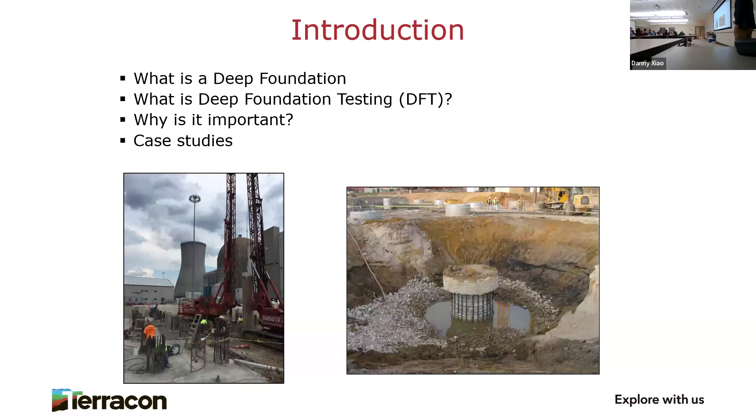So let's get started here—just an introduction of what this talk is going to look like. We'll start with: what is a deep foundation? I understand there's some geotech focus here, there's probably some structurals, but you may not all understand some of the things I'm talking about. So forgive me if I talk below some of you, and forgive me if I'm not technical enough for those of you that are familiar. We'll talk about what a deep foundation is, what deep foundation testing is, and why it's important in construction and in this process. Throughout, I'll have some case studies and project examples that demonstrate the importance of this deep foundation testing.

All right, so to get started, a little bit about Terracon. Danny introduced Terracon a little bit, but we're engineers and consultants with 4 main service lines that span the entire project lifecycle, from the very beginning stages of a project to the very end where we're involved on the construction side. Our 4 service lines are geotechnical engineering, environmental engineering, materials testing and engineering, and facilities engineering. Geotech and environmental happen very early on. Materials testing happens during construction, verifying the plans and specs. And facilities engineering happens on existing facilities that have maybe been around for 100 years and are going to be repurposed.

So the deep foundations I'm talking about today are mostly involved with geotechnical engineering and materials testing and engineering. On the geotech side, for those of you that aren't familiar, we're looking at the soils, designing foundations, making sure that the foundations and soils we're building on are going to be suitable, and we're not going to end up with a Leaning Tower of Pisa type situation where the building is tipping because the foundation is inadequate for the loads being applied. So foundation testing is important on the geotech side, because we want to make sure that what we're recommending is actually happening during construction on the materials testing side.

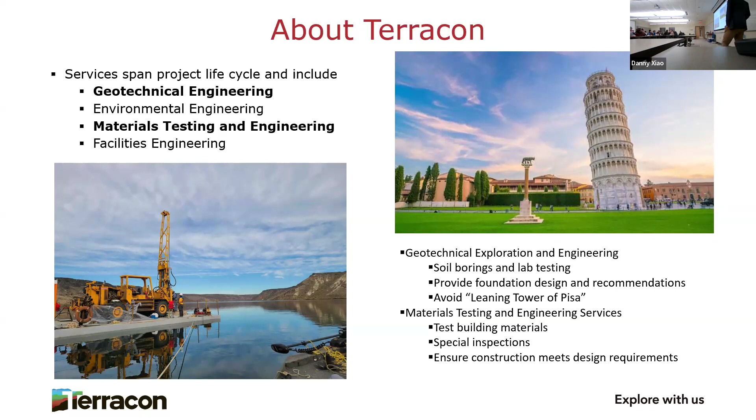So let's back up a little bit. What are deep foundations? And what types of foundations do we have? Well, there's two types of foundations: shallow foundations and deep foundations.

I'm not going to talk too much about shallow foundations here, but typically shallow foundations are associated with your lighter loaded structures or structures that are being constructed on competent soil—maybe resting on bedrock, or you're not dealing with expansive clays or something that's going to lead to settlement.

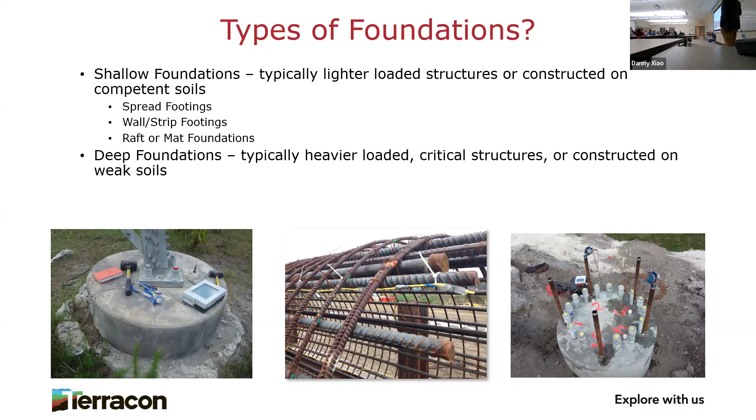Deep foundations are typically heavier loaded structures, critical structures, or constructed on weak and incompetent soils. So what is deep foundation testing?

Well, again, a little bit more on deep foundations. Deep foundations are intended to transfer structural loads through weak soil materials to more competent underlying soils, like bedrock, in order to meet load carrying capacity requirements. Won't talk too much in detail there—there's an equation, side resistance or skin friction plus toe resistance.

The thing I want to point out is it's a critical part of our construction of structures—typically bridges, which I was going to focus on and kind of broaden that. But bridges, federal buildings, tall structures, hospitals, arenas—a lot of big critical structures rest on deep foundations, foundations that transfer the load oftentimes down to bedrock or a strong material below us.

And deep foundation testing then is testing of those deep foundations—oftentimes non-destructive evaluation of the quality, integrity, and real performance of these foundation elements.

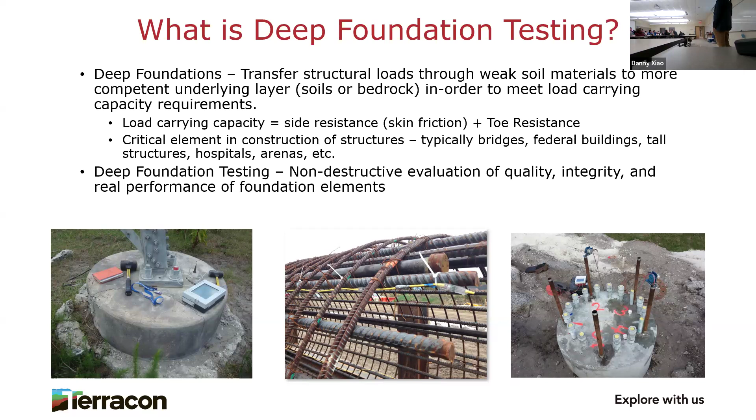So why should you care? As I said, deep foundations are a critical element in your structure. They're also a really expensive part of your structure.

Everybody cringes when we issue a geotech report that says it needs to be on deep foundations, because it means you just added a lot of extra expense to your project. If you can get away with shallow foundations, you're going to save a lot of expense. So it's a critical part of our project, but it's also really expensive—we want to make sure that this investment is sound.

Terracon's been around for 60 years—this is our 60th year doing business, doing geotechnical engineering. And over those 60 years, we've been recommending deep foundations, and we have seen a lot of problems with the construction of the deep foundations that we recommend.

Here is a picture of a deep foundation. This is a drilled shaft—I forget if it was a 6-foot diameter drilled shaft. It was for a transmission line in Mason City, Iowa, so not too far from here.

We did the geotech, we helped design the foundation, and they go to put the pole on the foundation, and it immediately starts to settle and tip. They pull it back off, they set it down, they call us wondering what the heck—there's a whole bunch of fingers being pointed, what's going on here?

We look at our report, we say there's no way that this thing should be settling. The structural engineer agrees that there's no way—it's over designed like everything. And so we get up there and we core, and 10 feet into the structure, we're no longer in concrete, we're in soil.

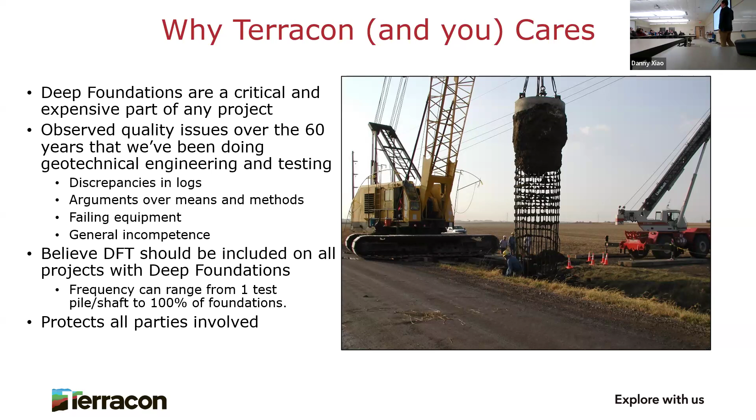So if we're the geotechnical engineer, having some sort of assurance that what we're recommending is valid. It protects the contractor in case something happens down the road. They did some due diligence, they did some testing to ensure that their foundation is good and there were no flaws. And it maybe doesn't protect the owner as much, but it at least gives them some warm and fuzzy feelings that this thing they're paying a lot of money for is a sound foundation.

Types of deep foundations: first, we have drilled foundations. So shafts, piers - you've probably seen some drilled foundations if you've been around construction. This is an example of a drilled foundation here.

Auger cast piles - this is an example of some auger cast piles here. You're drilling a hole and the augers are moving the soil. Then it's got a hollow center. You send grout down the center of that and it pumps up, and you remove the auger and it fills the hole with grout, and then you put some sort of a cage or center bar in that auger cast pile. And then driven piles.

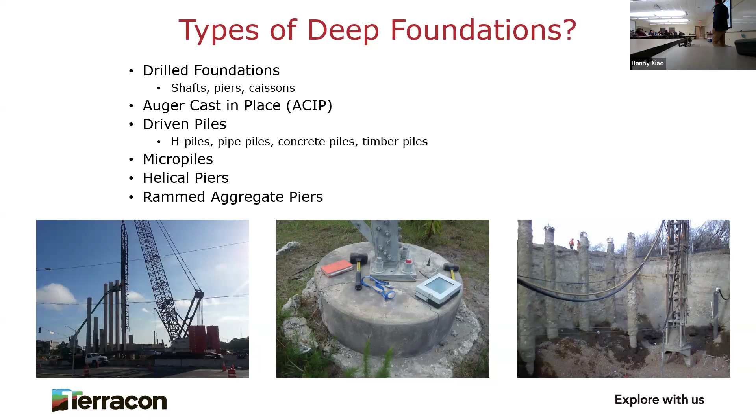So these are the three main foundation types for deep foundations. More recently, some newer methods have become more popular - they're efficient and cheaper - but since they're newer, there are fewer methods for deep foundation testing. So I'll focus on the three that are most common: drilled foundations, driven piles, and auger cast piles.

So deep foundation testing falls into three buckets. First is quality inspections and monitoring - that's just, ahead of time, we're going to test the concrete, we're going to be there to create a log, we're going to verify that things are generally being done as planned. Stuff as simple as checking elevations, testing the concrete as it comes out of the truck, and there are some tools for actually inspecting an excavation.

The middle and this last bucket is where I'll focus this talk. Integrity testing - actually testing the integrity of the concrete or grout of an in-place foundation once it's poured. And then load testing - once the foundation is in the ground, actually applying a load to the foundation, making sure that it's going to stand up to the load it's designed for.

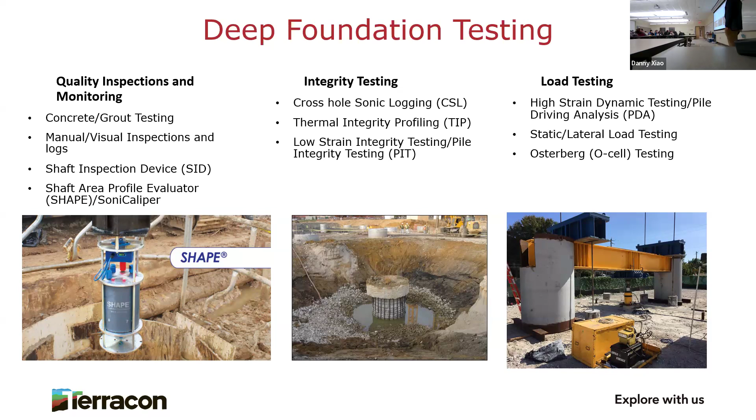So we'll start with this first bucket and hopefully breeze through this pretty quick - the quality inspections and monitoring. So first is concrete and grout testing. A drilled foundation has a material, right? So we're going to test the material.

We're going to be there when the truck shows up, we're going to take a cylinder, we're going to test the grout or the material. There are three types of tests that can be performed. One is a slump test - just to make sure the concrete is supposed to come off the truck with a certain slump. Then the second is a compressive strength test.

So we take a cylinder, we keep that cylinder under certain conditions, we take it back to the lab, and then 7 days later, 28 days later, we break it. We put it in a machine, we apply a load to it, and we see how much load can be applied before that cylinder shatters. So if it's a 4,000 PSI concrete that's specified, we want to make sure we can apply at least 4,000 PSI to this cylinder before it breaks. There are different things they look at too - how the concrete breaks, what types of shatter affect what happens on the back end if it breaks in a particular way.

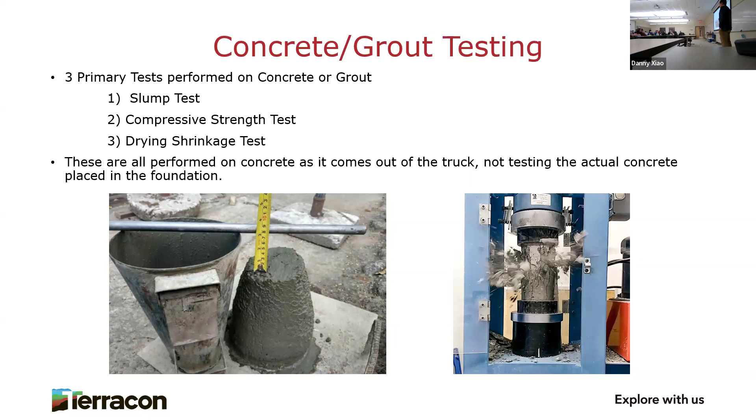So these tests are all performed on the concrete coming out of the truck. It gives you a good sense of what's going into the hole, but you're not actually testing what's going into the hole or the actual field conditions. Because if you're pouring right now when it's very cold, that concrete is going to react differently than a concrete cylinder taken back to a lab in a controlled environment.

Manual visual inspection - that's having somebody on site to visually see how things are doing, verifying means and methods, making sure the contractor is not doing something stupid. And that's surprisingly not a requirement. There are projects that slip by where contractors are just out there doing whatever they want, and then you end up with problems.

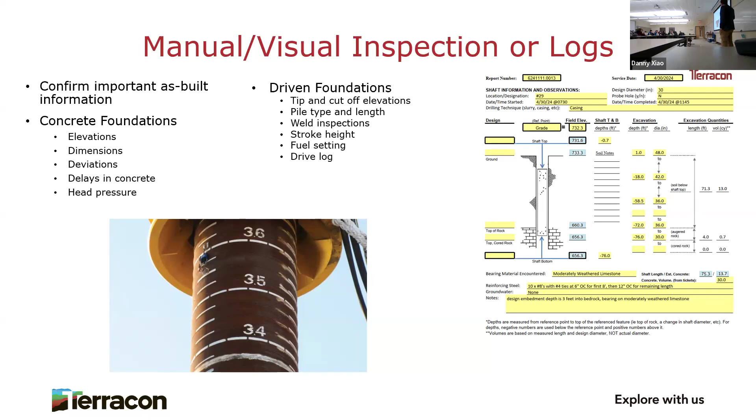This is just an example of a driven pile being on site, verifying the drive criteria and the hammer performance, and creating a log for either a driven pile or a drilled shaft. Here's some of the stuff that we're going to want to be verifying and looking at in the field.

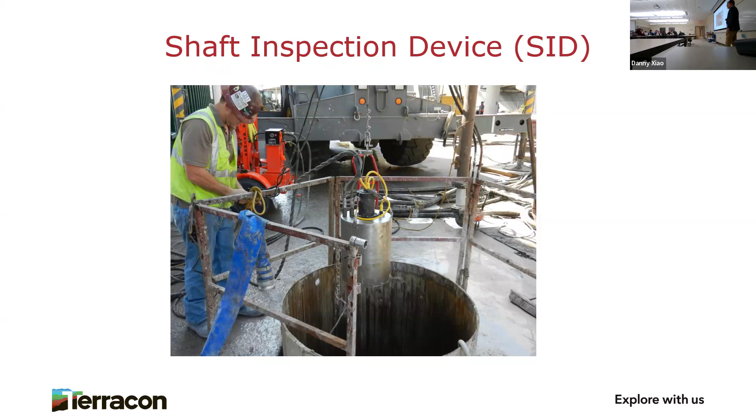So I mentioned a couple of devices. There's a shaft inspection device that can be sent down an excavation to make sure that if that shaft is end bearing, it's supposed to be bearing on a good flat, hard rock surface. Problem is when you drill that excavation and remove the soil, a lot of times you end up with a muddy mess at the bottom, and you want to make sure that's clean. Decades ago, you would actually send a person down the excavation and they would clean it out or inspect it. OSHA has since said that we shouldn't be doing that. So now we send this shaft inspection device down and it measures that and makes sure you're on a good hard rock surface and that there's not going to be a couple of inches of muck at the bottom of your concrete. And when you load that, it moves and settles, right?

And then we have this shaft area profile evaluator, another tool that can be used to inspect the excavation before the concrete is placed. That's just looking at the walls to show you the shape of the excavation. It can show you that it's plumb, that it was drilled straight, and that everything is as expected before the concrete goes in.

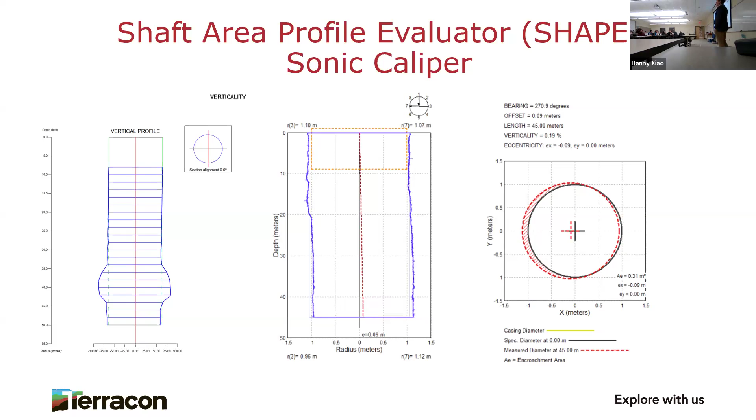Okay, so then we have integrity testing. This is looking at the actual shaft once it's in the ground. Integrity testing is typically associated with drilled shafts, concrete, or grout - so your drilled shafts, caissons, auger cast piles, and the like. There's three main test methods that I'll focus on here today. There are a couple others that are rarer, usually required in codes like California for certain structures, but otherwise not widely utilized tools.

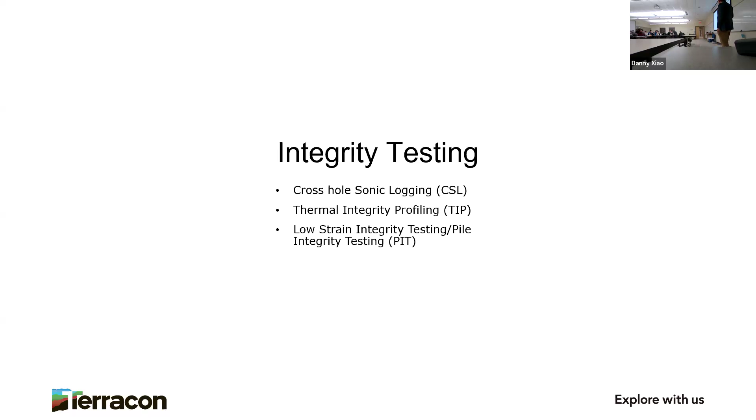We'll start with cross-hole logging. CSL has been around a long time. It's a great diagnostic tool, well understood, and it's a tool used to identify or verify the integrity of a drilled shaft. What we're looking for is anomalies in the arrival time or relative energy, and I'll get into that a little bit more. Big advantage to cross-hole logging is that it's been around a long time and is well understood and well studied, so there's an FHWA rating criteria. Highway projects, bridge projects, anything transportation related really likes CSL because it's got this rating criteria, and we can say that a shaft is good or bad based on it.

The disadvantage here is that we're really only measuring between two pipes - we measure between every tube pair combination. But the tubes, especially this time of year when it's cold and hot and you've got hot concrete and cold air temperature, we have expansion, and so you get a lot of debonding of the tubes. At the top of the shaft, particularly where it's exposed to air, you get debonding and can't get a signal through, so the upper few feet of data is oftentimes bad. The assumption is that you have straight concrete between the tubes, and a lot of shafts are designed with cross bracing - you can kind of see some cross bracing in here. Anything that goes between those tubes is going to show up in the data and be a potential false anomaly. And then you can only test a certain size shaft - I don't like to go much over a 6-foot diameter, but definitely not more than 8. So you're limited on some of your larger projects; you're just not going to get signal across a large diameter shaft.

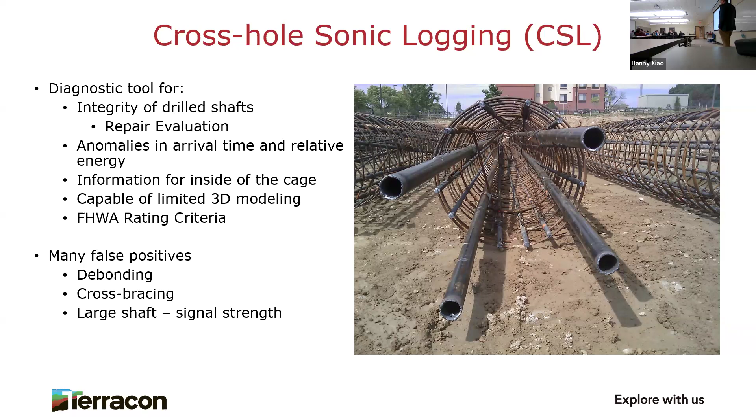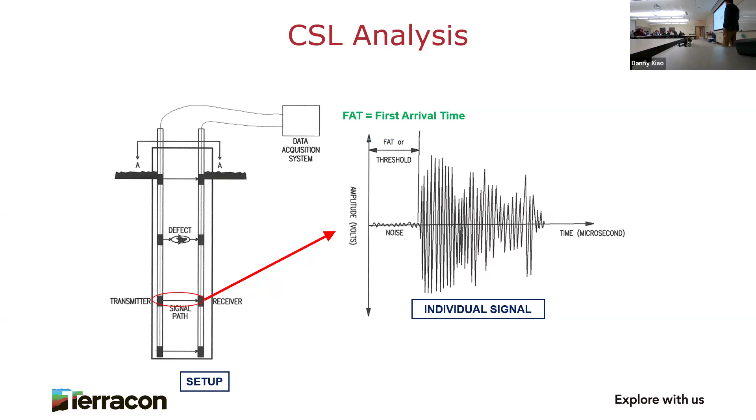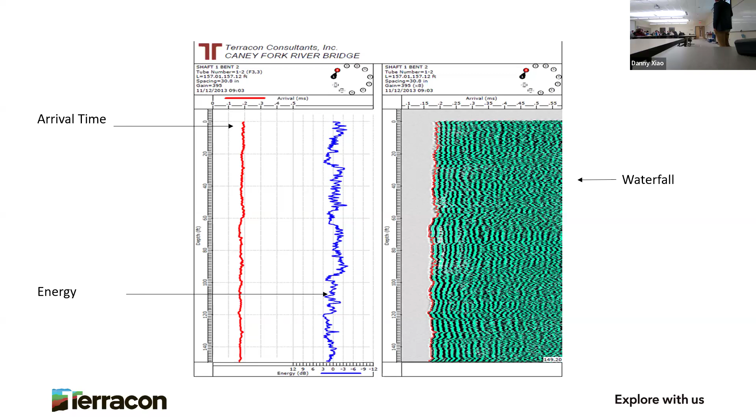But here was a bad anomaly in this drill shaft, and we got out there and cored it with our drill rigs. Here's the concrete that came back from that material. Maybe not catastrophic to your project, but could cause problems. So in this case, we can help identify, do some 3D modeling, identify where this bad area is. Then oftentimes they'll core two areas, get in and power wash out this bad material, and then regrout it so that it's solid.

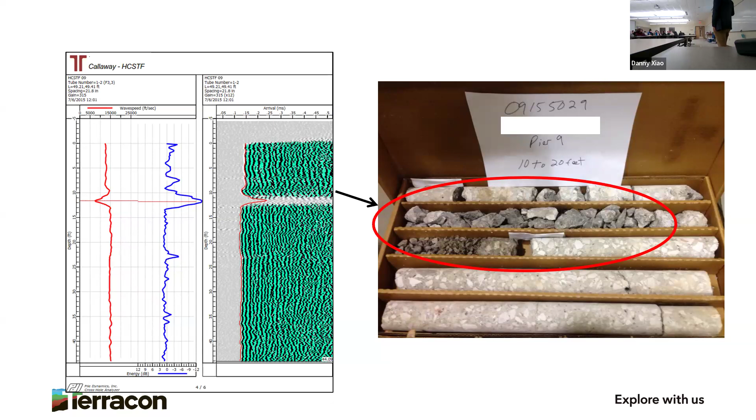So that's CSL. CSL is great, we've been doing CSL for a long time. More recently, especially in the last 5 years, but about 10 years ago, this thermal integrity profiling became an ASTM standard, an accepted ASTM standard. And that really, outside of transportation projects, has taken over for any concrete or grouted structure.

The thermal integrity profiling is very simple. You have a series of wires that are zip tied to the exterior of your rebar cage, and every foot there's a thermal sensor taking temperature readings. Very simple - you hook up boxes, it sends it to the cloud, and we can monitor it remotely. It's cheap, it's effective. You can have contractors set this stuff up, and as soon as the concrete is poured, you can start monitoring the shaft and identify issues early on if there are issues.

The big advantage to the thermal integrity profiling is that it's not directly between two pipes or outside of the cage - it's the entire shaft, so you're able to detect anomalies. The biggest disadvantage is it's newer - there's less research and understanding of how much of a reduction is a problem. So we don't end up with a rating of a shaft that says it's good or bad, pass or fail. But you get a ton of information - concrete cover, cage alignment, flaw detection, bulges, necking. There's a lot this can tell you, so you can sit down with your project and really determine what's going on with the shaft and correct means and methods so the shafts end up as designed.

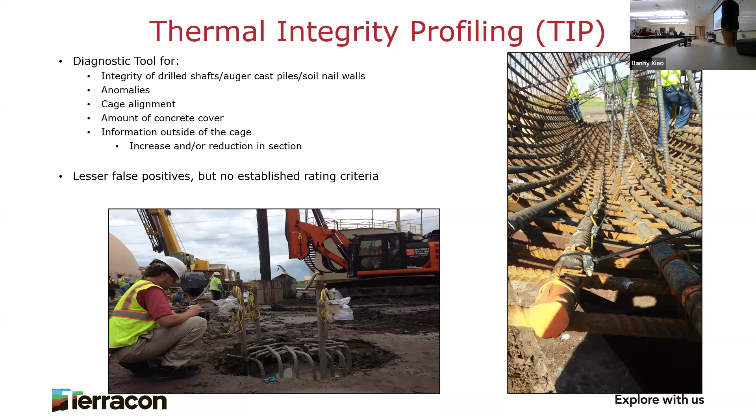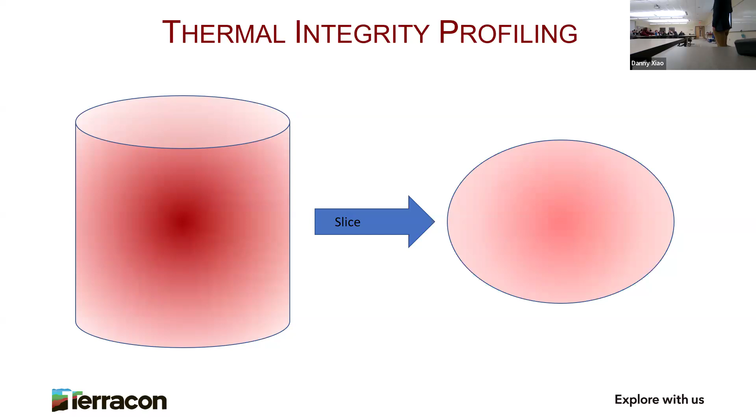So here's how this thermal integrity profiling works in theory, and then we'll show you some data in practice. For those who don't know, when concrete is poured and it begins to harden, there's a chemical reaction that happens and it gets really hot. Internal temperature of concrete as it's curing can be upwards of about 150 degrees. So you end up with a distribution of temperatures in a shaft like this, where the more concrete there is outside of the thermal sensor, the hotter it's going to be. So it's hotter inside the shaft than it is outside, where it's exposed to the soil, or on top or bottom where it's exposed to air or rock.

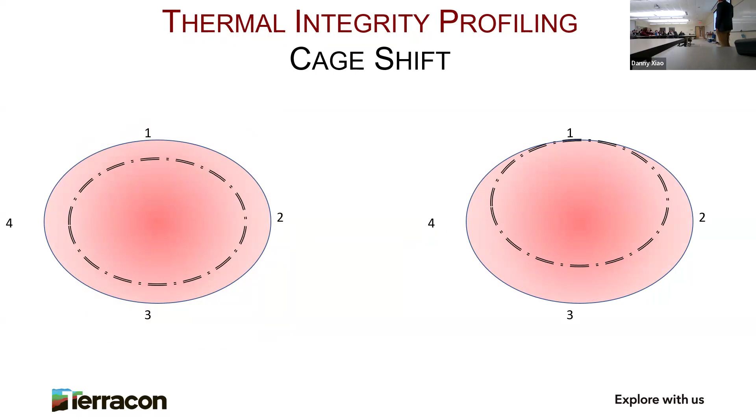So we can tell you by looking at the data things like cage shift - if it's hotter on one side of the shaft than the opposite wire, you look at opposite wires and can tell where the cage is in the excavation. Is it centered like it's supposed to be, or did it get pushed up against the wall, which is fairly common. You can tell concrete cover, whether there's a bulge or a neck, whether it's hotter or colder on all the wires, and determine whether there's an anomaly - soil collapse, weak concrete, a void, contaminated concrete. Cooler temperatures in a localized area are indicative of a flaw in the concrete.

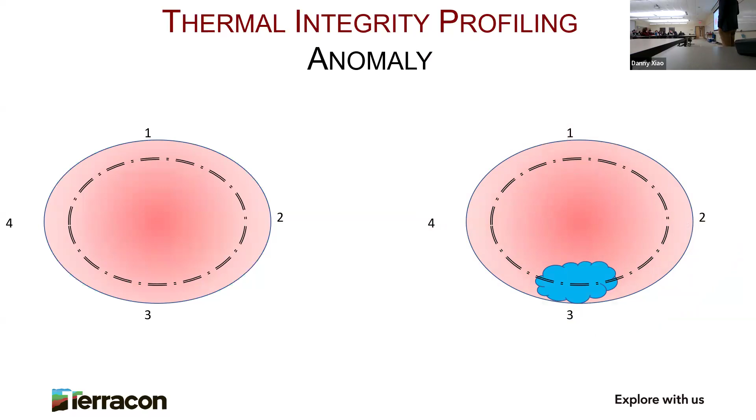So here's what this looks like in practice, this thermal integrity profiling. This is an auger cast pile, so a small diameter pile. Historically, we haven't really had a good way to test auger cast piles because with CSL, there wasn't enough space - you were taking up too much space in a small diameter pile to have that tube.

They didn't like it, there was no good way to test it. But now we can test with this thermal integrity profiling. We can test these shafts.

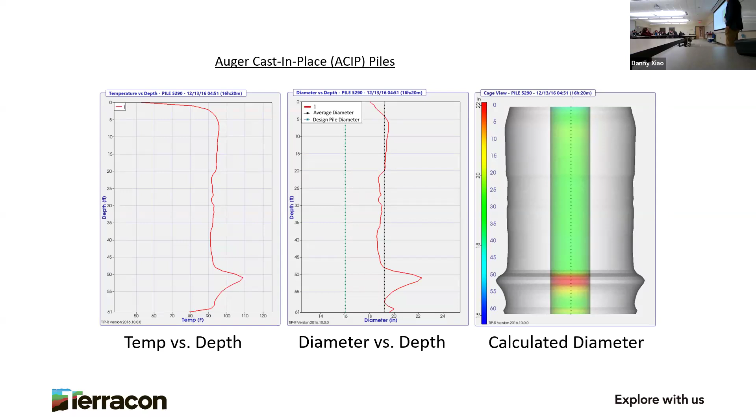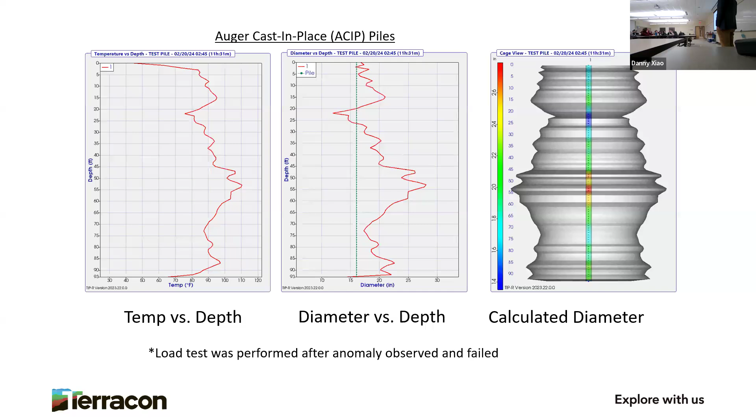We thankfully had budgeted for some load tests, which I'll talk about, but we did a load test on this shaft, and before it achieved the desired load, the shaft broke, the pile broke. Nobody likes to get that news, but it was good that we caught it before, during construction, and then the loads were applied, and then all of a sudden you've got a corner of your building that's settling and cracking, and you have a significant problem.

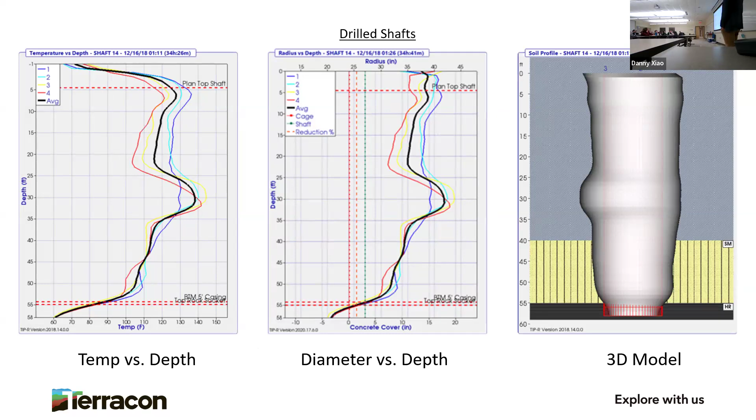Here's another example of a drilled shaft where in this case we have a bulge here that shows up in this 3D model. And then at the bottom, we kind of have a soft toe condition, where we don't have good concrete at the bottom of the shaft.

This was a kind of a case of incompetence, but in this case it was a contractor that had been around doing this for 50 years. And he was adamant that we've been doing it this way for 50 years. We don't believe that we need to pump this and tremie it.

The story was they came back after a long weekend, and what was a dry hole had filled up with water. The contractor was convinced that they didn't have to pump the water out, that they didn't have to tremie this, which means you put a pipe down and you pump the concrete from the bottom and it goes up. They were convinced they could just back a concrete truck up and pour the concrete in from the surface and all would be well.

And they said, we've been doing this for 50 years, this is how it's done, we've never had a shaft fail us. We said, well okay, we're going to test it and we'll find out.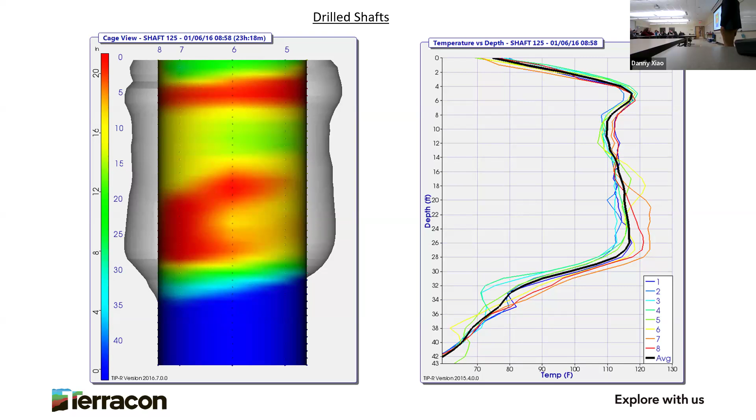So we got up there and we cored. Here's the cores from the good concrete, and here's the cores as it really starts to cool down. Hopefully you can see where that starts to become real brown, weak and crumbly. And then the bottom of that shaft came up in bags. It's not concrete at all.

It's a mucky material, so a very expensive shaft had to be re-poured. I don't think they ended up removing something this large, they just poured it adjacent and then used that shaft.

But the good news was we fixed this at the beginning of the project. So we knew going forward that if you have a wet hole, your excavation's wet at the bottom, you're going to pump it and you're going to tremie it, and your way is not going to fly anymore. We were able to correct this early on in the process, on what ended up being an almost 100-mile transmission line across the border of Iowa and Minnesota. You can feel good about the means and methods and that everything is good going forward.

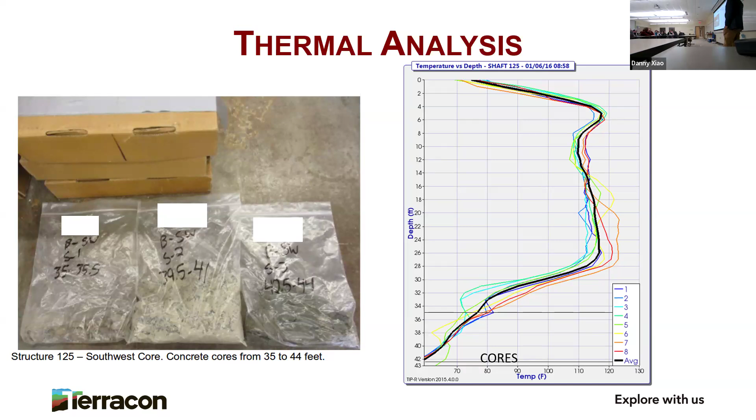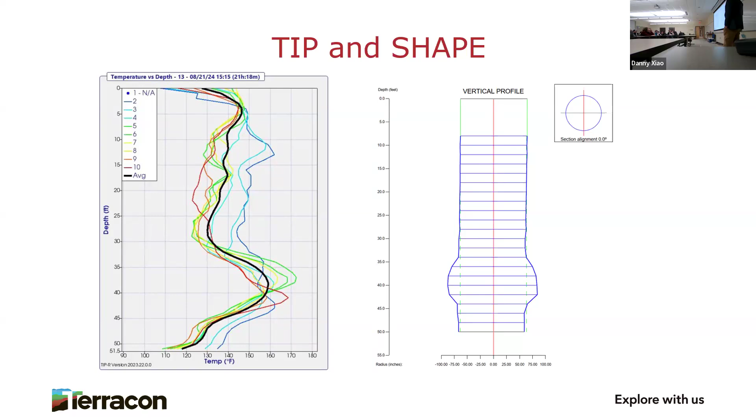I mentioned the shape earlier, but here's just another example of tip data next to the shape data. So here was the shape of the excavation. We knew there was a soil collapse during the drilling, and we had this bulge, and that shows up there in the data for the tip. I just think that's a nice comparison.

Pile integrity testing is the last integrity test we talk about. It's been around a lot and is probably overutilized because it's cheap, but it doesn't tell you a lot. In my opinion, this test should only be used if we're testing 10% of the piles or shafts on a project, and only if you didn't have CSL or tip tubes and tip wires installed on a shaft.

And there was a problem during construction, right? If there was a delay in the concrete truck showing up—this happens, where all of a sudden you have a 4-hour delay and you're halfway through a pour—well, you're likely to have some sort of laitance material, a cold joint, or some sort of an issue halfway through. So if you want to verify whether that's still good or not, you can do the pile integrity test after the fact.

Pile integrity test is pretty simple. It's oftentimes black magic—people are like, what the heck are you doing? All you're doing is hitting a hammer on the top of this thing, and you've got a sensor off to the side, and you're measuring the response at the surface from that hammer blow. Then you also get a response once it goes down and reflects off the bottom of the shaft and back up to the sensor—you get another response here.

We know the general velocity of concrete, so we can say it traveled this far, and that's the approximate length of the pile. That's what a good shaft looks like—you get a good response off the toe. If you've got a defect, a void, an intrusion, or some necking, you get a response off of something before the toe. In this case, we saw 2 defects and still saw the toe, which is pretty rare.

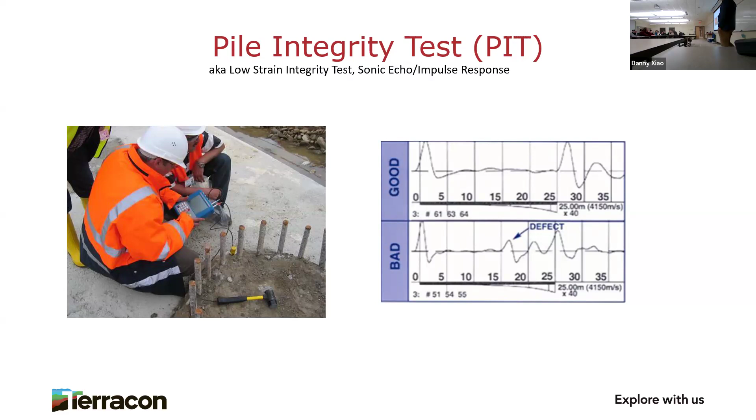But it's a valid test, ASTM approved, been around a long time, pretty well understood. There are just much better tools out there, and we shouldn't be relying on this unless we think there's a problem and want to verify that there's not, and we didn't do anything else.

So the third bucket here is load testing. This is actually looking at the capacity or the load bearing capability of a foundation. We'll start with driven piles.

So for driven piles, let's back up here. The first thing we do when driving piles is a wave equation analysis of the pile—a theoretical drivability analysis where we look at the soil conditions, the hammer that the contractor plans to use to drive the pile, the pile size, and we determine whether we can achieve the capacity we're supposed to achieve. For those of you who have never seen a driven pile, it's kind of a cool operation.

If you've driven out and seen a big crane up in the air with these big piles sticking out, and it's just going boom, boom, boom—it's real loud and there's smoke coming off the hammer. It's a cool operation. What's happening is, instead of drilling a hole and filling it up, we're driving the pile into the ground. They can be steel, concrete, or timber piles, but we're driving this pile into the ground to meet some sort of capacity.

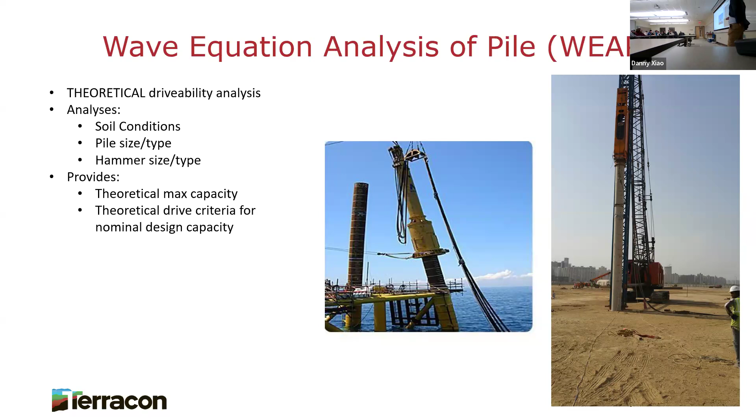So the first thing we do, like I said, is theoretical—verifying that the hammer is going to be able to drive the pile to capacity without damaging it, and that the soil conditions will get us the capacity we want. It's all theoretical, and a lot of times we tend to rely on this wave equation analysis too much. I'll show you some examples here of where that has failed.

So we perform the wave equation analysis, and then what we can and should do is perform a pile driving analysis, which you can perform on a certain number of piles throughout the project. You might section your area off into quarters and test 1 pile per quarter, or test 10% of the piles randomly, or test critical foundations carrying heavier loads that you want to make sure are good.

The pile driving analysis, or high strain dynamic testing, is an in-place real-time test. It measures the force and velocity of the hammer hitting the pile, and in real time tells you what the capacity is of that pile. So it confirms the wave equation analysis and confirms the drive criteria required for the rest of the project.

It's important. When I say drive criteria, I mean when we're out there driving a pile to a certain capacity, say 500 kips. Let's say we're going to refusal. We say refusal at 500 kips happens when your hammer stroke is at least 6 feet in the air, and the pile is moving less than about a half an inch per 10 blows. That's what the PDA analysis would tell you - we're confirming what that drive criteria is for capacity in real time.

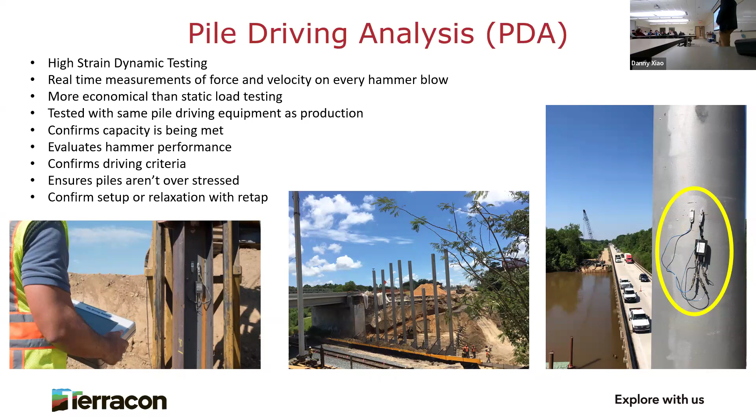A couple of examples where this has been really important. One is the Chester Bridge, an ongoing project, a very big bridge crossing the Mississippi in Missouri. The very first pile we did on this project, the contractor was forced to do PDA on all the piles so they could use a thinner wall thickness. But he thought it was pointless since they were driving to refusal criteria - everybody knows what refusal criteria is. It's when the pile stops moving and the hammer starts shaking. Why are we doing this?

Well, the very first pile we did, they drove to refusal. It's kind of hard to tell here, but they were not getting the capacity that was required on the pile. The contractor is saying, we're at refusal criteria, we're done, we're going to break this hammer if we continue - it's not moving anywhere. And we said, you're not at capacity.

So we dug into the data and started looking at the hammer performance, which is another advantage of the PDA. We said your hammer's not performing correctly. We went back out and hammered at a higher fuel setting - no change. We said your fuel pump's going bad. They humored us and said okay, fine, we'll change the fuel pump. They changed the fuel pump.

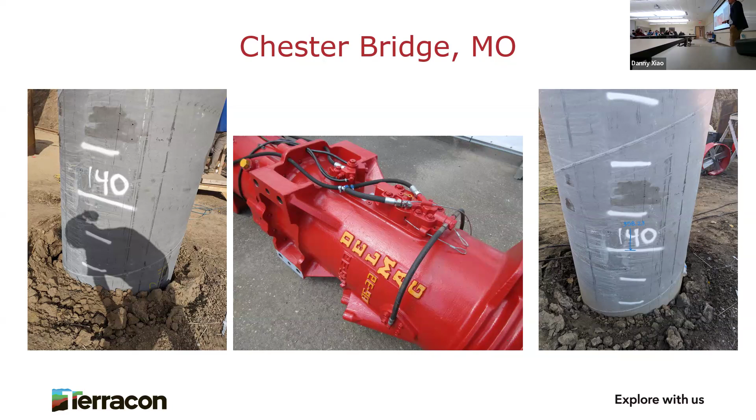Another example, the CRST building in Cedar Rapids, Iowa. Again, the WEAP analysis was not accurate in multiple ways. What we determined was theoretical capacity - looking at the soils, the pile type being driven, and the hammer they were going to use, we said yes, the hammer is going to be able to drive this pile to capacity at a certain depth. Well, they have a hammer on site, they have all their pile ordered plus 5 or 10 feet. They start driving the pile, not getting capacity. They drive at full depth, not getting capacity.

The hammer they had on site was not big enough to drive it to capacity. It started to not drive the pile any further. So they had to bring on a new hammer, and that hammer drove the pile full length and was still not at capacity. So then they're in a real dilemma because the project's already been delayed because they had the wrong hammer on site, and they already have all the material ordered. What do we do now? It's either going to be very expensive to start welding and splicing these piles on top of each other, or...

What they decided to do in this case was completely redesign, at the 11th hour, the entire building. They took off a couple of floors off the top of the building and said, here, we're going to lighten the load, lighten the capacity requirement across the board so we can meet capacity with the material we have on site and the hammer we have on site. So it was a big deal. But they said okay, we're going to move forward with the foundation design assuming this capacity, and we're just going to redesign the building to the different capacity requirement. But you could imagine how bad this would have been had they just done this based on the WEAP analysis, and then none of the piles and none of the foundations could meet the capacity requirements of this building.

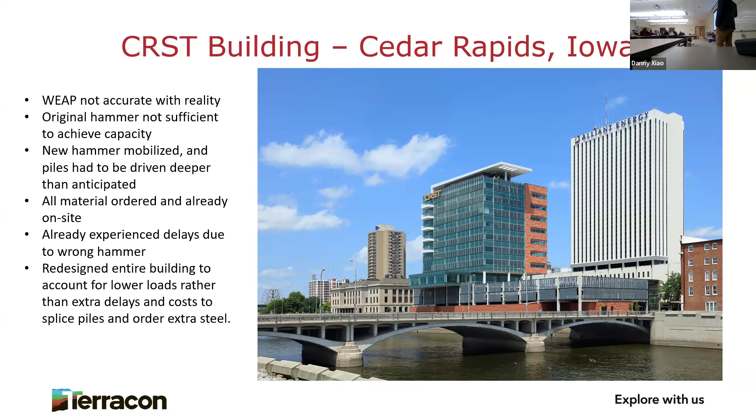The last thing we'll talk about, well actually there's two more, is load testing. Static load testing is done on an in-place foundation. You can have a pile cap, but your foundation is in place and ready to go, and we test this with a static load test.

We slowly apply a load with hydraulic tools and a reference beam to the shaft. Oftentimes we're going 200 to 300% of the design capacity, pretty high loads, but incrementally increasing the load and measuring any settlement or movement in the foundation. You can do this both compressive, with a downward force, or lateral, pulling it to the side, just to make sure it can take the loads it was designed for.

There's a lot of different ways to do that. It's slow, it's expensive, and you have to bring in special equipment, but it's the truest method of confirming this thing can take the capacity and load it was designed to take.

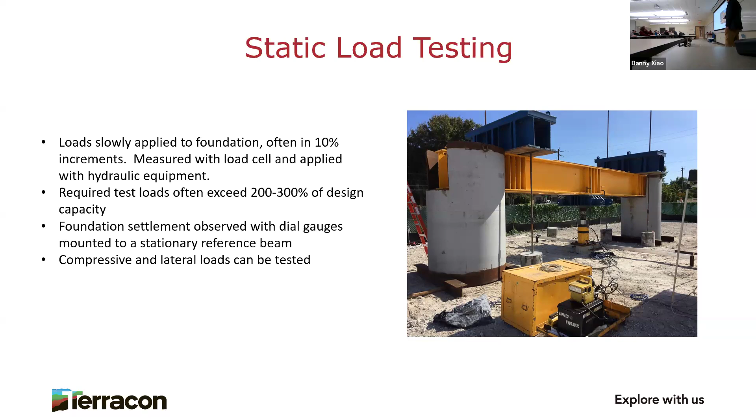One thing I didn't mention about the PDA is the big advantage: it can be done on a test pile if you want, or on a production pile. It uses the same hammer, the same equipment that's already there for the duration of the project, so nothing special has to happen. You're just there, you test the pile, and you pay a little bit extra.

The last thing is bidirectional O-cell testing, which has become more popular in the last few years. It's expensive, specialty equipment, specialty contractors. You put an O-cell in the shaft, often near the bottom, and you're able to test this to very high loads, upwards of 220 meganewtons of force. The advantage is you can test both upward, downward, and lateral forces on a shaft.

So it's expensive, but this is a true measurement of load capacity, and gives some integrity information too, because if it starts to fail, you have an integrity issue. It's kind of the truest method of actually applying a load to a shaft and testing multiple facets of the shaft's performance.

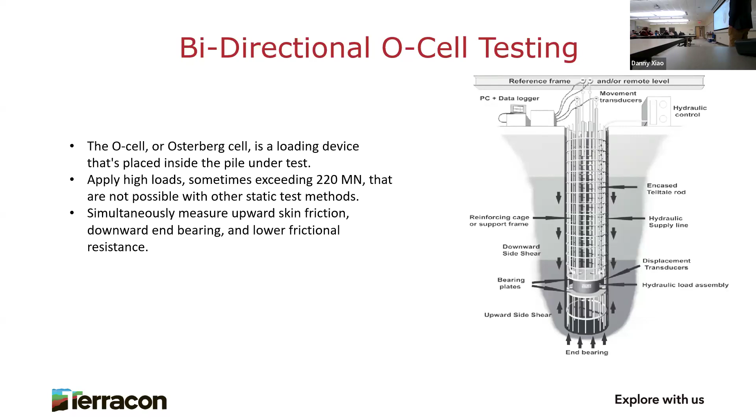Okay, I'm at 45 minutes. Conclusion: I've said it multiple times, but your deep foundations are a critical part of a structure. If they're recommended, they're there because they're important, and they're very expensive to install. To date, there haven't been a lot of requirements for what the QA/QC, quality assurance and quality control, should look like on a drill shaft or deep foundation. So we're doing our part to push the industry to do more quality control, more deep foundation testing, and at least require some standard for logging and inspection of deep foundations.

Remember, I always point this out: if we're recommending a deep foundation, it's because the structures are critical and most heavily loaded, and they're going to be the most catastrophic if something fails. Your Walmart Supercenter on a mat foundation, if it starts to settle and you get some cracking, Walmart's probably mad at you. But if you have a high-rise building or a bridge that starts to settle and that deep foundation starts to fail, it's going to be a catastrophic failure. So spending a little extra money on QA/QC and recommending this type of foundation testing is critical moving forward.

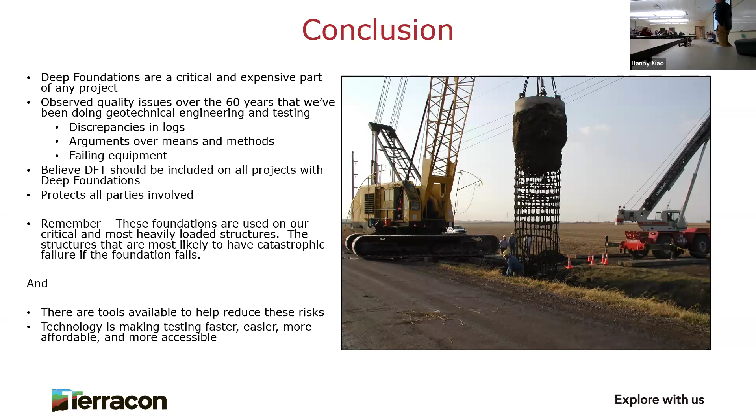Why are there only certain projects you have to do it on instead of all projects?

We're trying to make it so that all projects require it. Right now, the DOTs are really the only consistent entity that includes it in the specs that you have to do. But there's a lot of commercial applications that don't require it, like high-rise buildings, federal buildings, hospitals. We're really pushing hospitals because obviously it would be a bad deal if a hospital were to collapse. We're pushing it on critical structures, or sites where we're drilling and think this is going to be really difficult to install a drilled shaft or an auger cast pile, so you'll want a little QA/QC on it. But it's just something that, for whatever reason, the industry hasn't pushed hard to require, and I feel like it's flown under the radar and been an issue longer than it should be.

So you guys only do it on DOT projects? No, we do it on more and we recommend it on more. It's a conversation we often have with structural engineers where we say, hey, this is important, let's include it in the specs. Then it makes it into the design drawings as a requirement. But it's not often built into any sort of code that you have to perform this test.